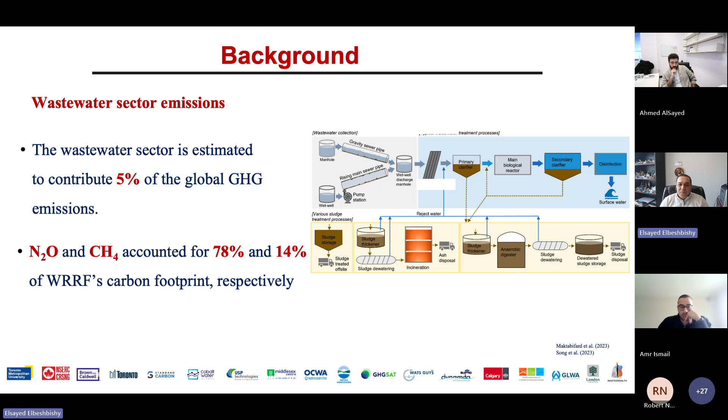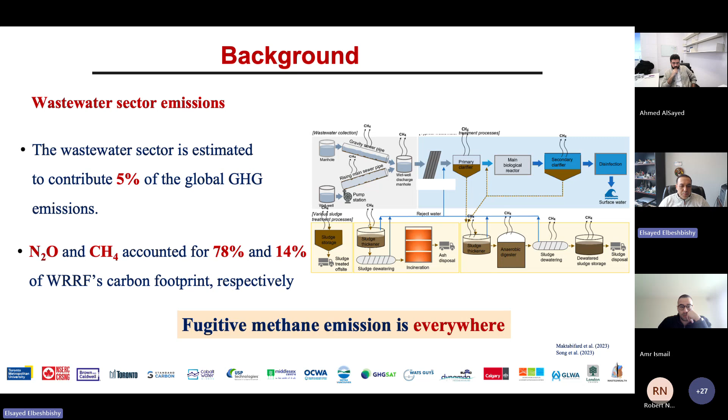Today, we're going to focus on fugitive methane emissions, and based on our experience over the last 3 years, we can say with all evidence and confidence that fugitive methane emission in any wastewater treatment plant is everywhere. You cannot exclude a single process that does not have that methane emission, except the disinfection process, but all the other processes have the potential of producing fugitive methane emissions.

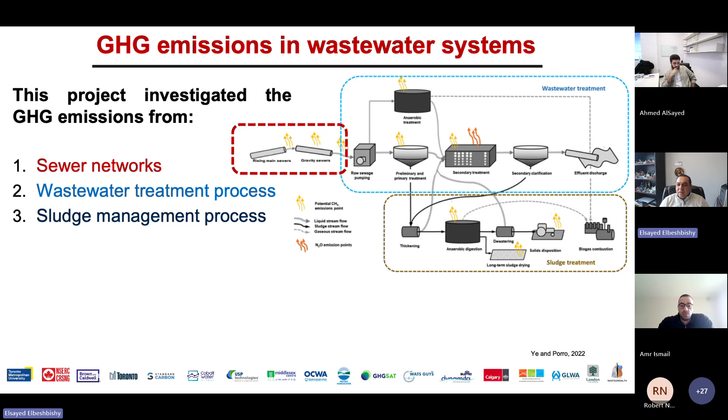This specific project was quite a large project focusing on the three main components involved in greenhouse gas emission, starting from the sewer system, where we now have one of its kind two pilot sewer systems, and we are in the process of producing a digital twin for the sewer system, the first one in Canada. We're also examining greenhouse gas emissions, both nitrous oxide and methane, from the main wastewater stream, as well as the main source for fugitive emission in wastewater treatment plants, which is sludge management.

There are different sources, as you may know, for the different emissions. We are focusing on methane emission in today's presentation.

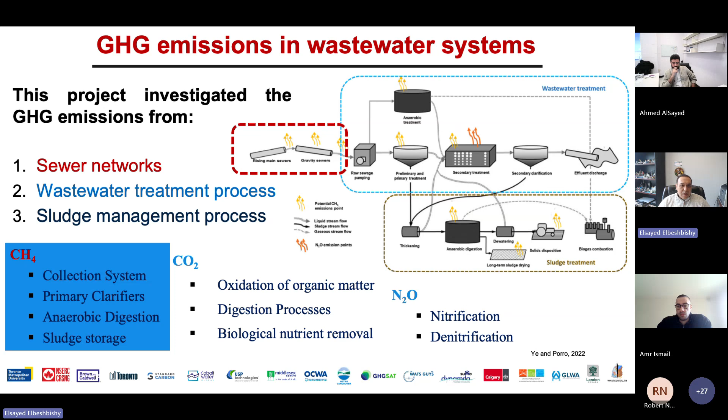In this specific project, the dream at the beginning, not only the goal but a dream, was to have what we call a multi-level greenhouse gas detection, starting from ground sensors, then a handheld OGI camera, and then going to another level with drones, aircraft, and satellite.

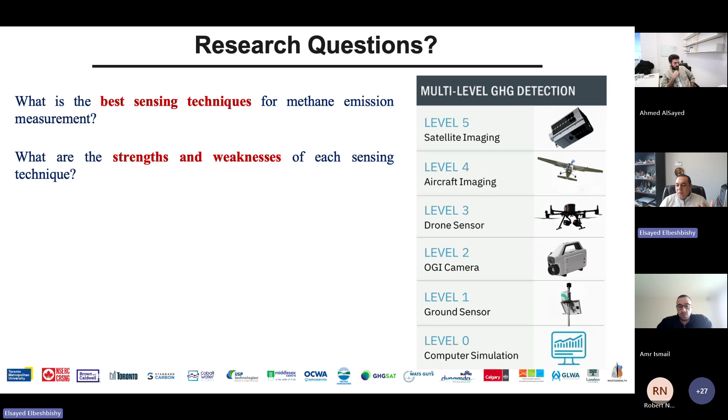At the beginning we had a few research questions we wanted to answer. By using those different detection sensing methods, what is the best sensing technique for methane emission measurements? What are the strengths and weaknesses of each of those detection techniques? And then we wanted to implement modeling, both mechanistic models and machine learning models as well.

One of the goals for this project was to estimate the methane emission from the plant-wide scale and compare it with the default calculation using the IPCC emission factor. Then, by investigating that plant-wide modeling, we wanted to see what opportunities the model can offer versus the challenges we have when we go through that process.

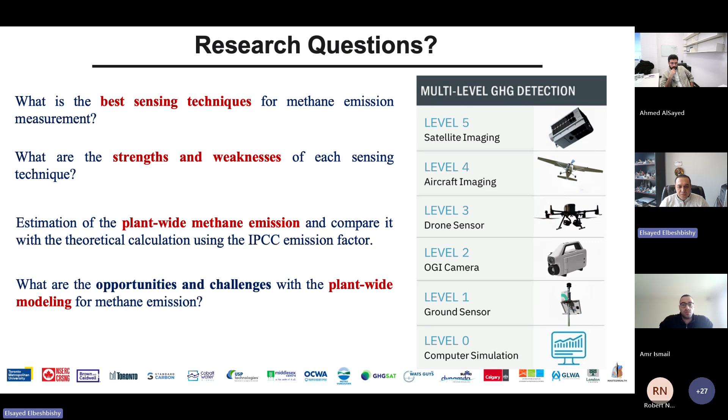This is the part where we are going to share with you our learning experience through this journey of examining the plant-wide methane emission from a specific plant site.

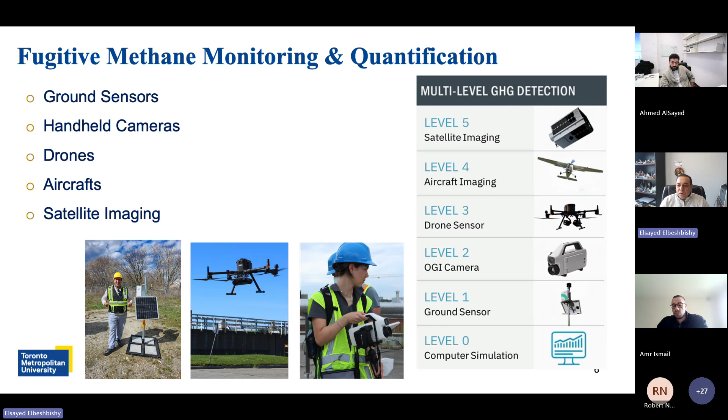As I mentioned, we used different sensing techniques, starting from fixed ground sensors, handheld cameras, drones, aircraft, and satellite images. When we went through this journey, there were a lot of challenges with each of those sensing techniques, and I'm just summarizing some of the challenges that pushed us to further invest in the modeling part, because we see there is a great opportunity in that modeling, as Ahmed will explain in the next slides.

Based on our experience with the sensing technologies in general, it is resource intensive. It requires big investment and is logistically demanding, especially if you want to measure methane emission using the drone. The logistics behind that, getting the approval, and all of those things is really demanding and requires some effort. On the other side, there's the accuracy and the detection limit.

For example, satellite imaging covers a big space, but it requires a certain emission threshold, otherwise you wouldn't be able to detect the methane emission using satellite images, and the same for aircraft. This is one of the challenges: some of these sensing techniques cannot be applied for wastewater treatment plants if you don't have high emission flux or concentration.

Another factor impacting all of those sensing techniques is the weather. If the weather is not good enough for the drone, for example, you cannot fly it, or if it's foggy, you cannot use the aircraft. Satellite images are also impacted by the weather.

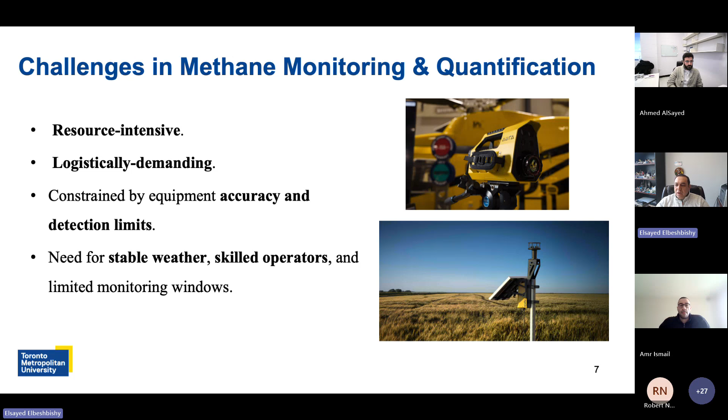So all of those limitations gave us an opportunity to think: there is a role for modeling in this project. And from that, we pushed toward investigating the plant-wide model. I think Ahmed will go through those opportunities and challenges for the plant-wide model.

Ahmed will share with you the role and potential of plant-wide models in the estimation of fugitive methane emission. So Ahmed, I'm leaving the floor to you.

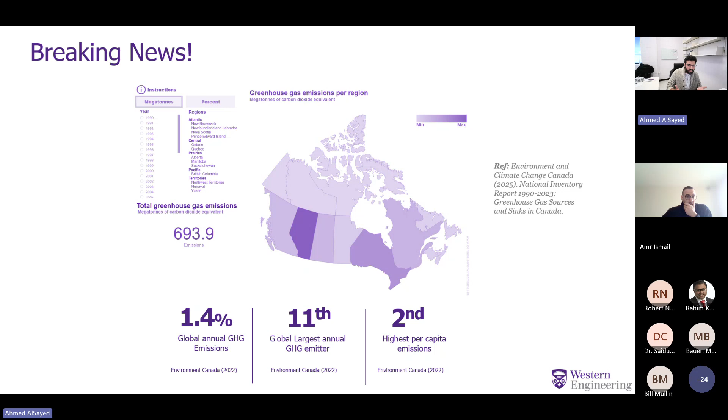Canada is actually contributing to this. I think Canada is one of the most progressive countries looking into means to mitigate it. But so far, statistics say we are the 11th largest contributor to greenhouse gases. If we normalize per capita, we are kind of like second. So we are actually contributing, and that's why the government cares about this, putting ambitious plans to mitigate it, aiming to reach the net zero emission goal by 2050.

So what does that have to do with wastewater treatment plants? There has been a lot of literature looking into the impact of wastewater treatment plants. Early on, we were thinking maybe scope 2 emissions — electricity driven, related to energy — would be the main driver. But by looking further, we notice that scope 1 emissions, the direct emissions, are actually the key contributors to greenhouse gases, coming from different biological processes.

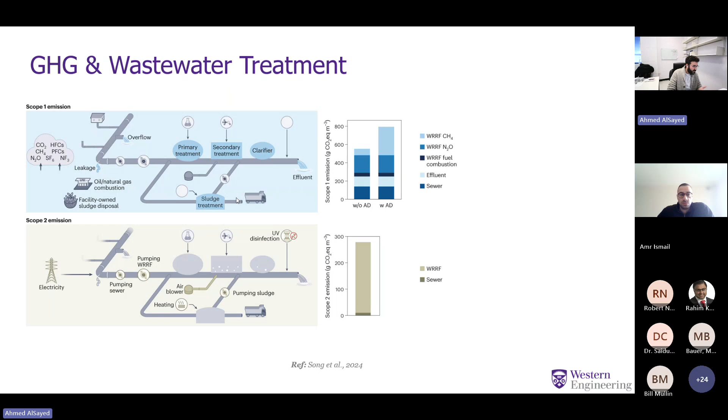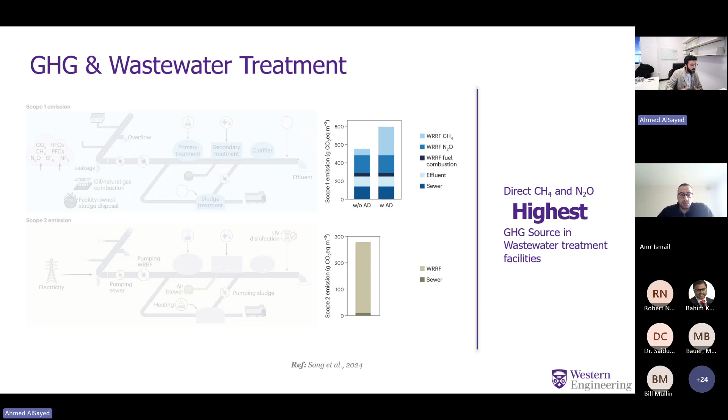In many countries, including Canada and many provinces, we rely on green energy sources, whether nuclear, if you consider it green, or hydro. So decarbonization of the energy sector is actually making direct emissions more and more important. By looking into that, the wastewater treatment sector is considered the third or fifth largest contributor to non-carbon dioxide greenhouse gases, second only to energy and agriculture.

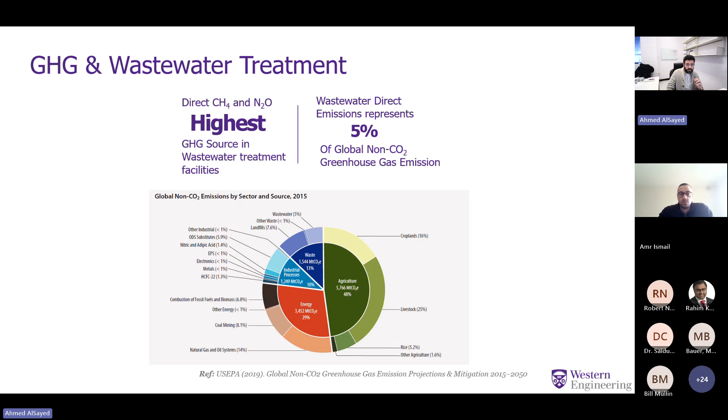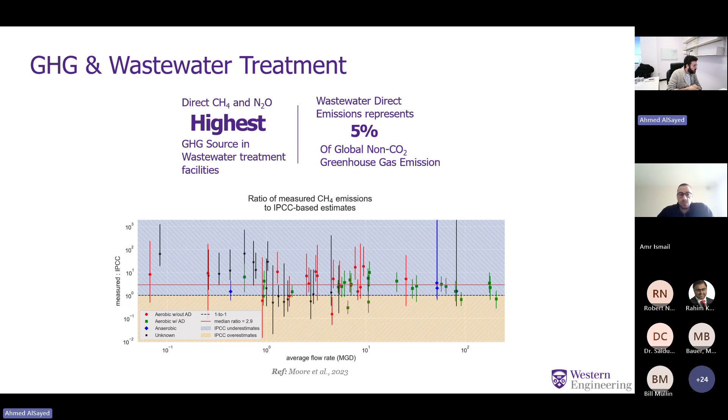So it's important. But what really matters for this research, what makes it more important, is actually the uncertainty or variability around the estimation of methane emissions, greenhouse gases in general, but for the focus of this talk, the uncertainty around that.

If you look into this research done in the US, looking into different treatment plants, different sizes, different configurations — with anaerobic digestion, without anaerobic digestion — what you can see is that regardless of whether we're talking about the same type of treatment systems or different systems, there is variability within the treatment plant itself. You can see from the huge variability that even estimating one treatment plant has huge uncertainty. And even the same type, for example the red ones, vary significantly in how much emission is there.

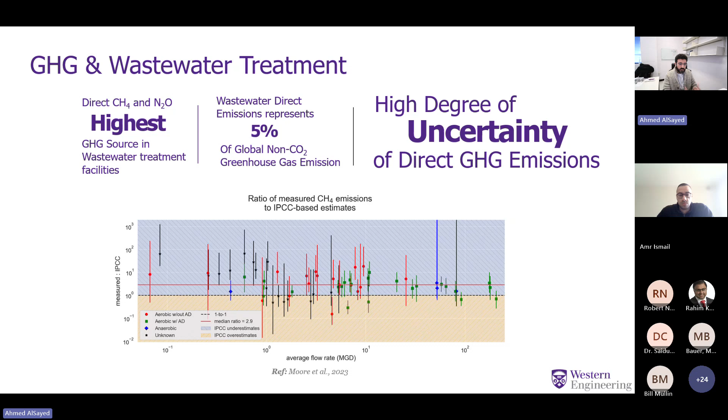So for me, this says the key question we still have is how we can quantify it, or how we can manage things to do this. We have two main challenges we've been making progress on. The first is quantification methods — I've used this meme from The Office for every single talk I give on greenhouse gases. We sometimes believe we know exactly how to quantify it, how to measure it, but while we're making progress, I can't argue that we know 100% what we're doing.

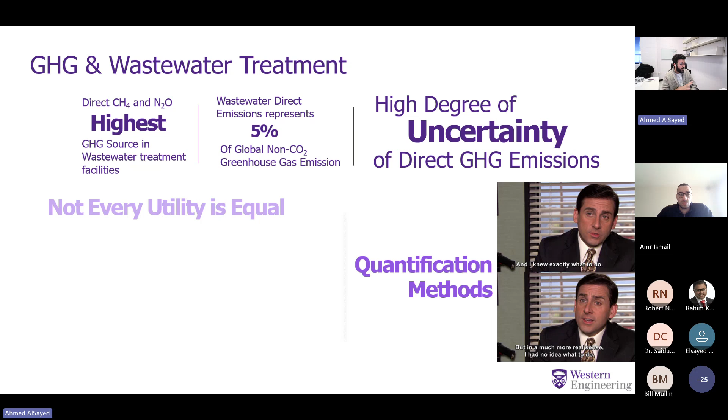The other challenge is basically that not every utility is equal. For example, in the literature it's suggested that nitrous oxide is the main contributor to the greenhouse gas or carbon footprint of a treatment plant, because of its high global warming potential. But our experience going to different treatment plants showed that in some cases, methane can actually be the main contributor, depending on how treatment is managed, how the system is operated, what the compliance limits are, and how everything works. And even that profile changes, and how dynamically it changes is something to consider.

My take on that is it depends on how you operate, how you manage it, and how you handle things. That makes diagnostics and mitigation strategy a key thing—we need a tool that tells us if we're moving more toward a greenhouse gas emitting situation or the other way around.

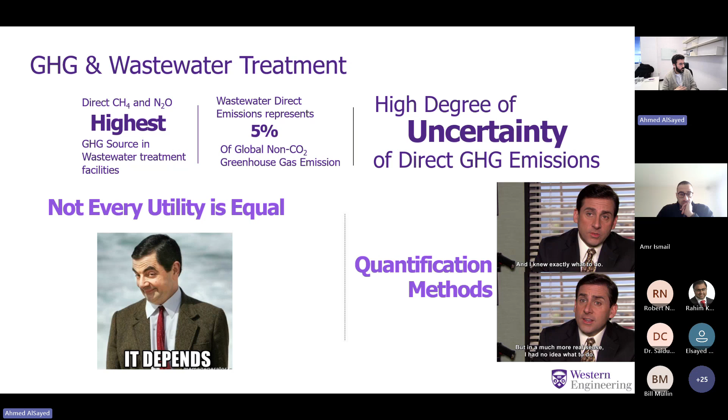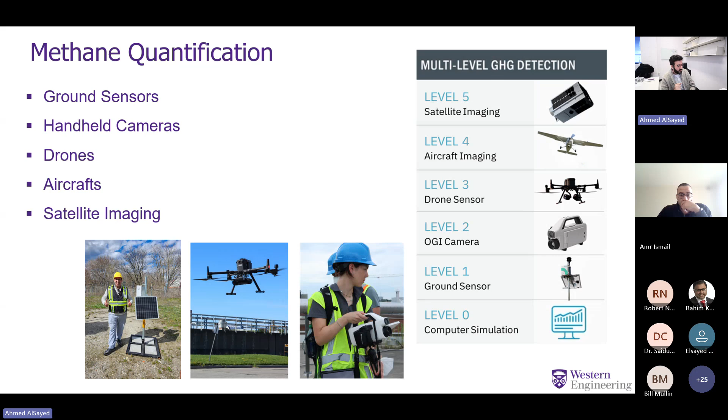Let's focus more on fugitive methane emissions and how we do this, leading to why we need to do plant-wide modeling. As Dr. Said said, for this project we've been looking for about 3 to 4 years into different means of quantification: satellite imaging, aircraft imaging, drones, OGI cameras, ground sensors, and definitely computer simulation.

Based on our experience looking into those different components, we can look at the specificity of those tools—how specific is it, how capable this tool is of isolating one source and saying this emission is coming from this specific process, and also how accurate it is, or how much we trust the result.

So the uncertainty around it, or the standard deviation—we look into it that way—and also how continuous it is. In specificity, when we try to isolate something, we look into the spatial component of it, and when we look into continuity, we look into the temporal component, how it's changing with different dynamics.

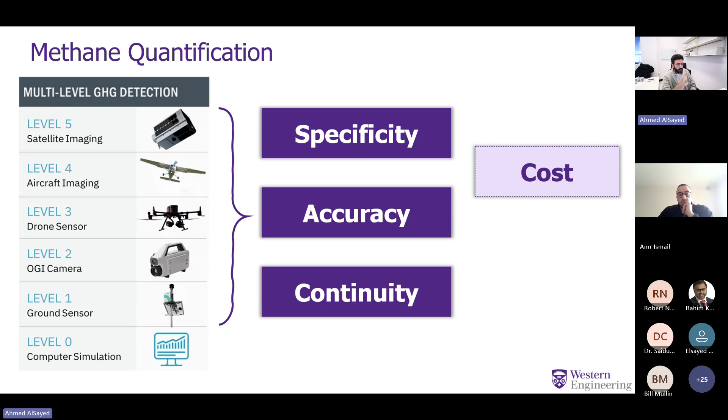When we try to design what kind of campaign we'll have, we look into two main things: how much it costs to make this feasible for treatment plants to apply, and also how good it is at diagnostics. Because if eventually we know how much we're emitting but we don't know how to mitigate it, how this links to how we operate the treatment plant, then yes it's valuable information, but maybe we can do better and do more.

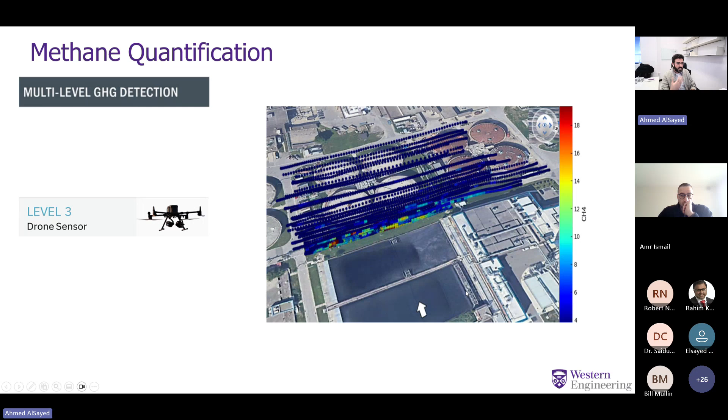I'm not going to go over every single thing—I'll just give an example with drones. This is typically how drones look. If we have a system like this and some wind conditions, we fly the drone, build the curtain, and then fly it upwind, downwind, or other ways to isolate this source, and then estimate the emissions coming out of it.

If we take this as an example, we can see it gives us quite good specificity—we can isolate sources. Its accuracy is okay, acceptable compared with other systems, quite accurate. It doesn't give us any continuity because we cannot keep measuring this all the time.

We cannot capture any dynamics in the system. It's quite costly—you have to bring drones, which are expensive, with a pilot, and facilitate a lot of logistics for the campaign. Its diagnostic value depends on when you fly it, how you fly it, and if at that time your emissions were coming out. I'll talk about the nature of methane emissions in a second.

If you try to make this more helpful for diagnostics, you have to do different campaigns over a year or over a fixed interval of time—you'll have some better continuity, but it won't capture all the dynamics. You'll have significantly higher cost, and maybe that improves your diagnostics, but you're struggling with high cost, maybe not very good diagnostic capability, and because of the lack of continuity, maybe accuracy is okay.

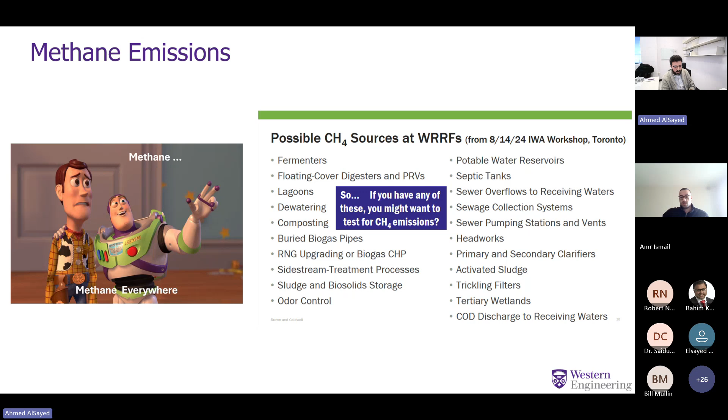And the reason why it's important, as Dr. Said was talking about—another thing I always show in my talks is that methane is everywhere. It's fugitive, it comes from many different reasons. This is a screenshot from a workshop in Toronto we had in 2024. Almost every place can be emitting methane.

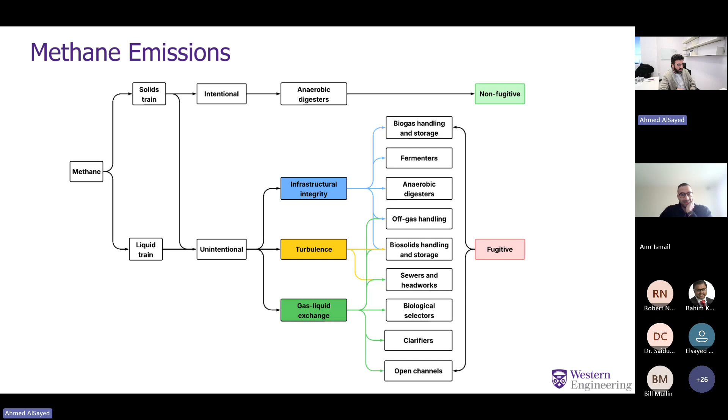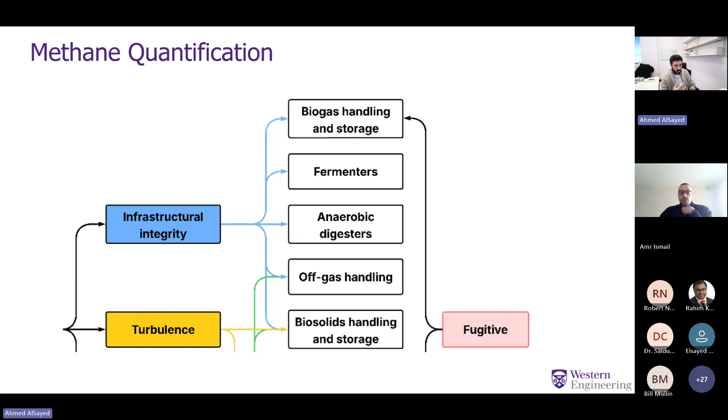Working with Amr, we tried to group this into some means of grouping to see which ones we should care about, and actually eventually we ended up caring about everything. Only the methane intentionally produced by anaerobic digesters is the one we don't need to worry about. But other than that, it can be unintentionally emitted from many different reasons—gas handling or leakage because of lack of infrastructural integrity for all the processes where anaerobic digestion can be produced.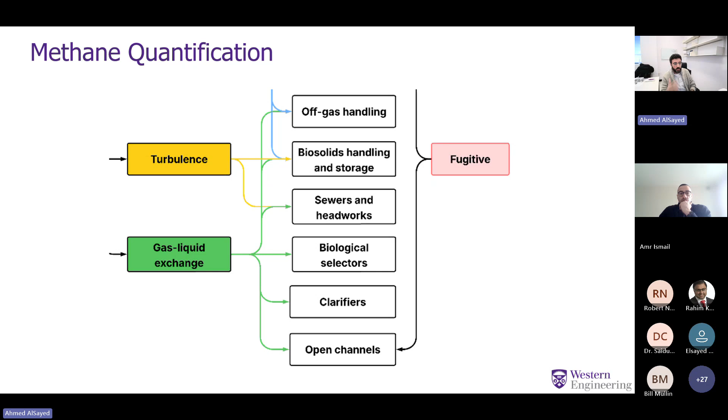It can be because of gas liquid exchange, something coming with the sewers, so it starts to be released, some unintentional dead zones in your aeration tanks. So we have emissions out of that, it can come from everywhere. But the key here is that this is unintentional, so it doesn't have to be continuously coming out. We won't always know when exactly it's being emitted and when it's not. So it's important to have some sort of continuity and some sort of diagnostics.

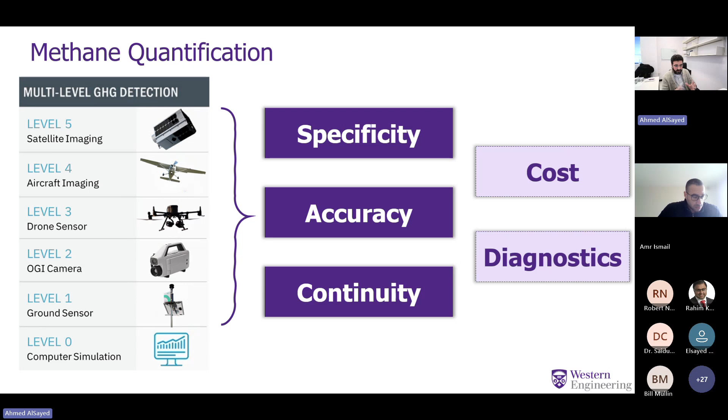If we look into any of those 5 tools, we will always struggle balancing everything to have proper cost and good diagnostic tools. The only thing that can give us low cost and proper diagnostic tools is basically modeling. So that's how we came up with the idea: let's use plant-wide modeling to do this, because this would be the only tool that gives us proper accuracy, very comparable to what we get out of the drone. Amr will talk about how we compare what we get with what's available in the literature.

It's going to be very specific. You can model any process and get the results. The cost is not going to be too high because it's basically model-based, and it can give you a very large diagnostic capability, because you can try scenarios, try different alternatives and test them, and you can tailor it to be as accurate or as far from accuracy as you would like to.

And here I just want to show that even when we fly different drones with different capabilities, and this hopefully will be published soon, we still get a very high uncertainty limit. So even if the accuracy based on the calibrated models wasn't 100%, it's very comparable to what we usually get out of things. So what would we do?

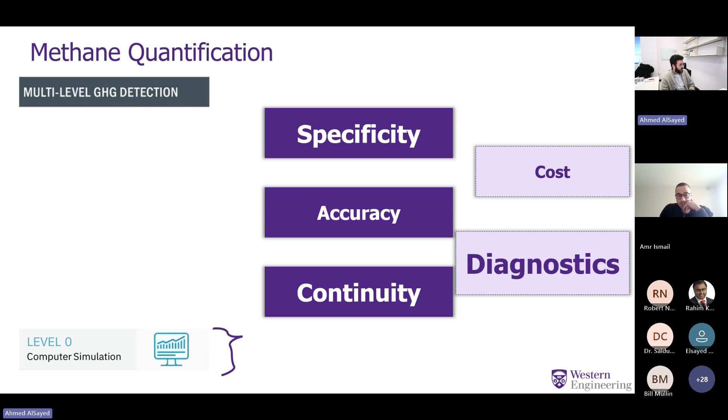Just very briefly, the idea is that we start to look into plant-wide models. Why not do this? This was part of the research that we have done, and Amr continued to look into the literature. We looked into it together, and basically we found that in many cases we just use empirical values like IPCC emission factors and pair this with activity data. If we have proper data or more detailed data, we can have a little bit more accurate estimation.

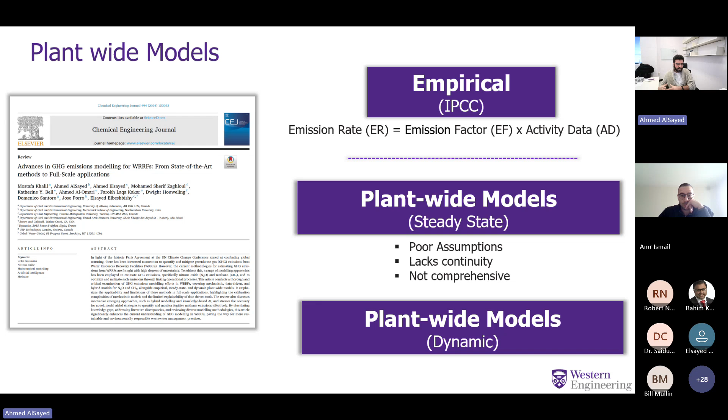But this is kind of static. Then we have different plant-wide models, either steady state or dynamic, but we always struggle with poor assumptions, lack of continuity if we're talking about steady state models, or that it's not comprehensive enough. It does not cover all the unintentional sources that we're talking about, it just focuses on one or two assumptions. It says EF is the key, so it's going to be a fixed percentage out of it.

So basically what we are proposing, and what Amr will talk about more, is a plant-wide model that gives us reasonable accuracy, has high specificity, and covers different sources of greenhouse and fugitive methane emissions. It can be monitored continuously, it's very low in cost, and it gives us a very high diagnostic capability. Basically, it covers all unintentional sources, so pay attention to different things that can be estimated.

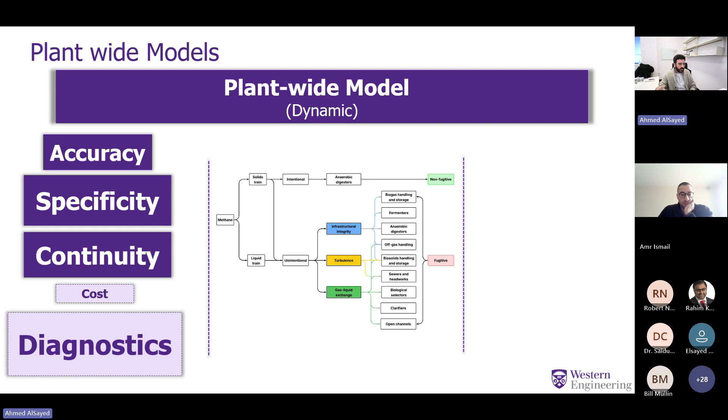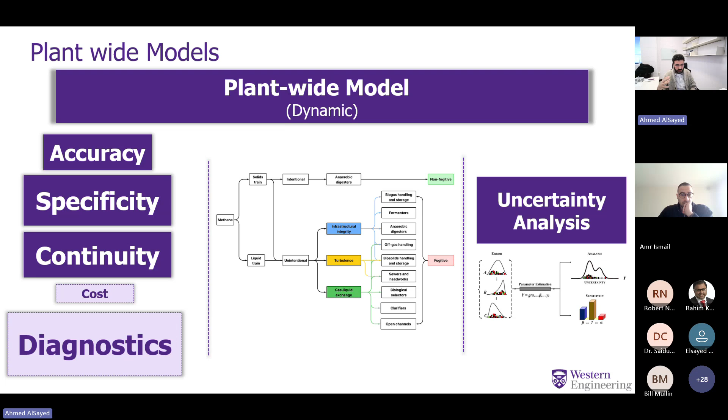Also, what we have specifically for this case, and Amr will talk more about that, is we figured out that we don't have enough data about every single case we want to test, and we don't have enough information about the methane emissions coming out of it. So we did different scenarios to start some uncertainty analysis, and see if those cases, given what we know from the literature, can get us to end up with high methane emissions. And with that, thank you, and I leave it to Amr.

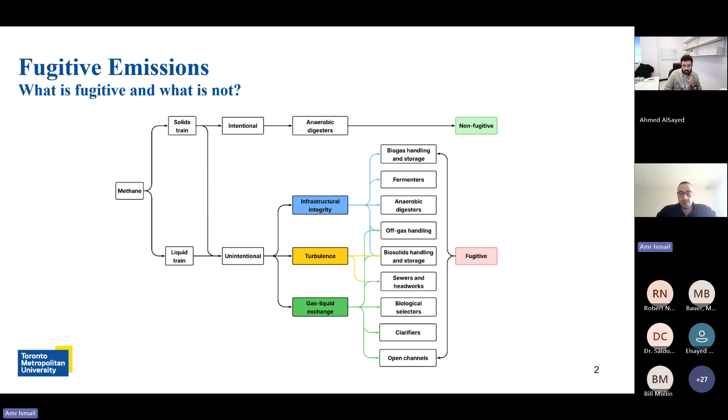As Ahmed pointed out, methane emissions can simply occur from every single process. It's only produced intentionally in the solids train in anaerobic digesters, but unintentionally in the liquid train and also in the solids train through biogas handling, fermenters, off-gas handling, leaks, changes in temperature, or whatever it is. So it can be emitted from every single process, and that would be considered fugitive, because only in anaerobic digesters, where it's produced intentionally, is it considered non-fugitive.

But the problem is there's a difference between the dissolved methane and the gaseous methane. Dissolved methane comes from the sewers, from the sludge blanket of the clarifiers, from fermenters, from bioreactors, and from sludge dewatering liquors that are recycled back to the plant's headworks. It's only in the gaseous phase from fermenter off-gas, digester headspaces, and dewatering.

The problem is the main focus of monitoring campaigns is quantifying the gaseous emissions, and the dissolved methane remains a blind spot. How does it remain a blind spot?

As Dr. Elsayed and Ahmed mentioned before, you need almost perfect conditions to take on a monitoring campaign, and plants do not operate continuously. Let's say you're doing your campaign early in the morning and the plant has already done the dewatering and done all the recycling at night. Depending on the sewer network, you're receiving that dissolved methane also at night, or at some part of the day when you're not monitoring anymore.

And all of this interferes with the accuracy of the monitoring campaign and plays into the cost, because you would need to cover the whole day, which nobody would do.

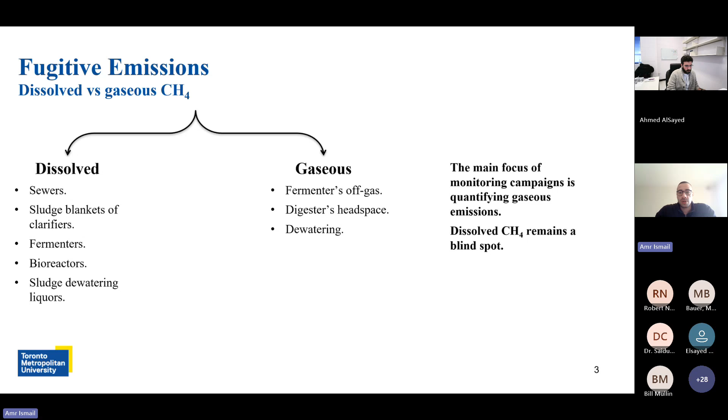In this case, the plant we were working with is a very large plant, a biological nutrient removal plant, so we have a lot of different process configurations that can also emit methane. It's not just aerobic processes removing carbon or doing only nitrification — you also have anaerobic zones, anoxic zones, and fermenters that can also be septic sometimes.

You also have recycle streams from the digesters, dewatering, and sludge thickeners. So all the potential process units that can produce methane exist in this plant.

The treatment here is divided into 4 trains — this is plant A, plant B, plant C, and plant D — and the flow rate is not distributed equally between those. We also have a fraction of the primary sludge that is fermented in the fermenters to produce VFAs.

Since it's a cold-region wastewater treatment plant, sometimes the SRT is decoupled from the HRT, meaning the sludge sits in the system way longer than the liquid, which can also cause it to digest and ferment and produce methane. Eventually, all of the fermented and thickened sludge is pumped into 8 mesophilic anaerobic digesters, and the biosolids are either treated off-site or on-site.

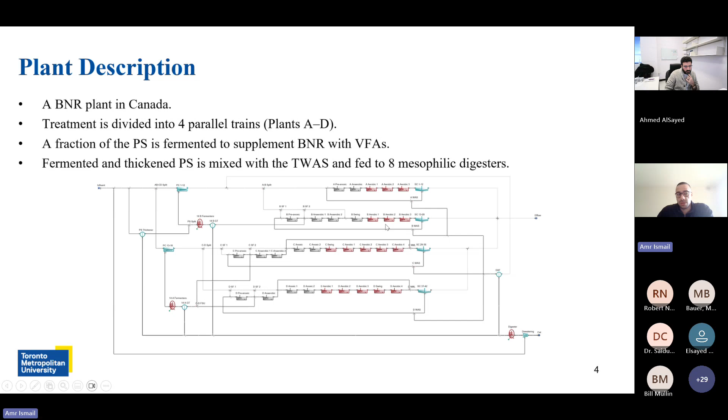For us to be able to do all of this, we needed data for the model. The plant operators were kind enough to give us about 3 years of operational and performance data. All of this data has to be aggregated into a single data set and then pre-processed.

No data from a plant is going to be perfect. You'll find categorical values like some stat, NR, E — all these symbols that don't really mean anything, and they cannot be added to the model. So we're removing categorical values, removing any negative values because they cannot be negative, and removing all the zeros.

Rows where there were shutdowns or operational upsets cannot actually be introduced into the model. We made sure the data that was removed wasn't enough to compromise the work we did, because it was only a fraction of it — we need actual long-term data for the model to capture temporal and diurnal changes.

Also, an important part of data reconciliation is making sure the data is correct. Measurement errors occur, and you can always reconcile something. Let's say the sludge COD is a bit off — you can reconcile it with the TS data, which is more accurate and less prone to error, because thickened sludges tend to be very difficult to actually analyze.

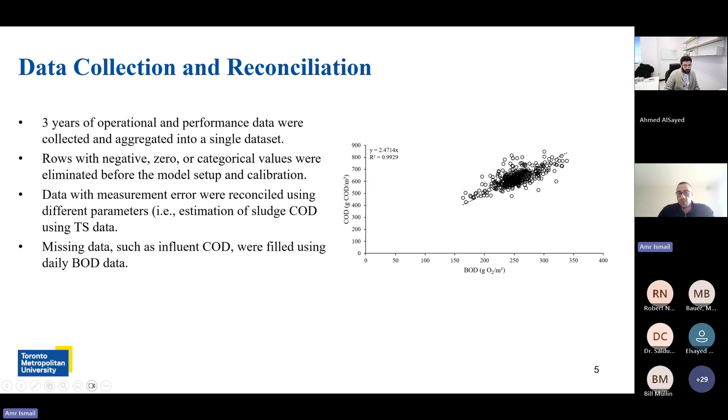Then we go to the model's setup and simplification, and we cannot just do that blindly. We have this guideline for using activated sludge models that we always reference. There's a trade-off between model complexity and process fidelity. We want to simplify the model as much as possible so it's easy to use and manage, but we also want to capture everything. So we have to find that fine line between simplifying it, but not so much that you're missing out on the benefits of the model.

So we were using Sumo here. Sumo number 2 was the model that we used. It's the simplest BNR model, has 2-step nitrification and denitrification, and enhanced biological phosphorus removal, which is basically all we need. Methanogenesis is also included, so it can capture the methane from both hydrogenotrophic methanogenesis and acetoclastic methanogenesis.

Similar process units like clarifiers, bioreactors, fermenters and digesters are combined into a single unit. We have 8 digesters on site, but flow is distributed equally, and the biogas is collected from all of them at the same time. So I don't need to add 8 digesters into my model. I can just put 1 digester and it would suffice.

Parallel trains are also modeled as a single train. Plant A, for instance, has 4 reactors, and the flow split between them is equal. So I don't need to model the 4 trains, I can just model the whole plant as a single train. Also, physical separation units like the DAF, dissolved air flotation, and gravity thickeners are modeled as volumeless point separators, because if they're modeled as actual units, the model becomes very complex and it's almost impossible to calibrate.

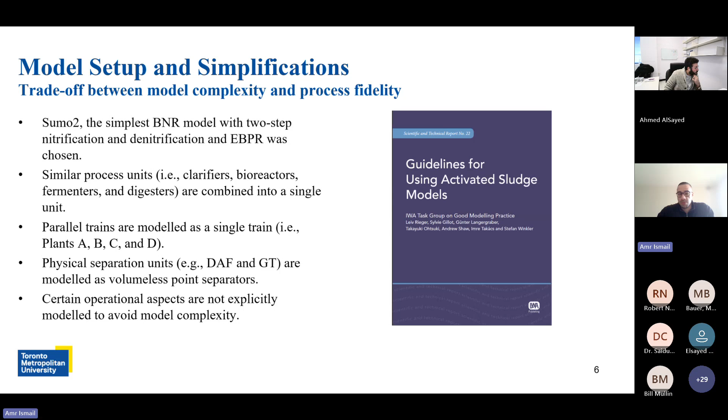Also, certain operational aspects are not explicitly modeled to avoid model complexity. Something like fermenters receiving elutriation water to wash out the VFAs as much as possible is not modeled explicitly, but as long as we can match the characteristics of that supernatant, we're good.

And then model calibration and validation. Calibration is the process of adjusting the model parameters to match the plant's behavior. There's a steady state and a dynamic state calibration that can be carried out.

And the calibration process involves basically global plant-wide changes. For the influent, we had respirometry data to make sure that the influent coming to the plant is actually represented correctly, because otherwise anything downstream is wrong from that point.

Something like the decay rate of ordinary heterotrophic organisms. In the fermenters, we have to adjust hydrolysis rate and fermentation rates. For digesters, we also have to adjust hydrolysis rates, pH inhibition limits, and other variables like the hydrogen yield during fermentation. Sometimes these parameters are over-exaggerated and you need to calibrate them accordingly. Correction factors and effective saturation depth make sure that the dissolved methane in the digester that is going to escape eventually is actually modeled correctly.

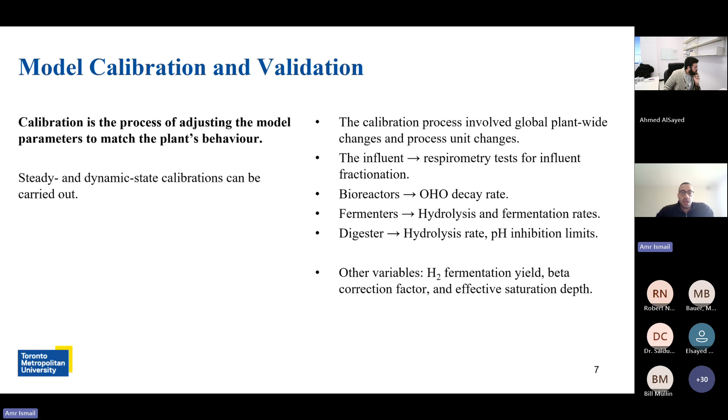After that, the validation ensures that the calibrated model behaves similarly with independent data. So if we did the steady state calibration on the median of the entire data set, now we're modeling the entire data set to see if it can capture the dynamics and capture them correctly also.

And then we look at different scenarios. So the baseline scenario, which is the existing scenario inside the plant. We have bioreactors as a source of methane that can be producing it in anaerobic and anoxic selectors. Digesters, we have 8 anaerobic digesters, and basically any discrepancy between the reported biogas and the modeled biogas production could be considered a leak, but not necessarily. So this is a basic source.

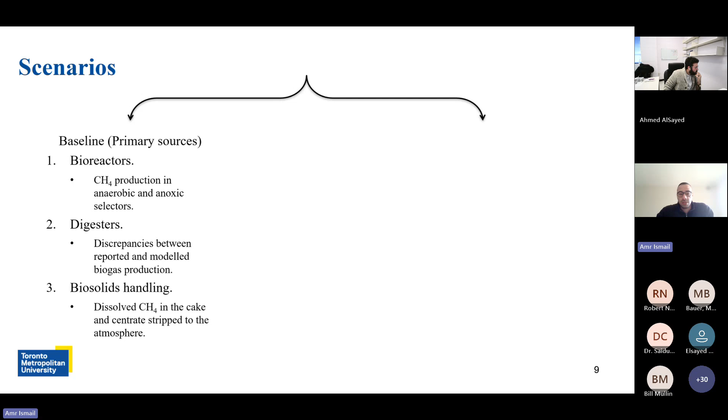And then you have biosolids handling. Any dissolved methane from the digesters going into the biosolids handling facility, whether it ends up in the cake or in the centrate, is going to be stripped into the atmosphere. And then we added potential sources for the scenario. So we have sewers, any methane stripped through aeration or turbulence. And then with the sewers, we divided them into a lower bound and an upper bound scenario.

So there are networks that receive septic tank effluents and gray water, so they would have more dissolved methane. And then we have the typical gravity sewer network that would not have that much methane, but there is still a certain concentration of it.

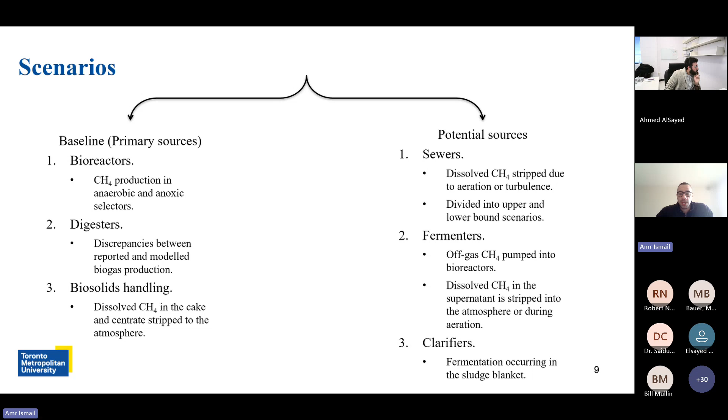We have fermenters on site that were not producing methane, but what if they were producing methane? Because the off gas of the fermenter is pumped directly into the aeration tanks, so anything would be stripped into the atmosphere and would be considered fugitive. Also, clarifiers were considered as a potential source afterwards.

So for the uncertainty and sensitivity analysis, we do the uncertainty analysis in Monte Carlo simulations, which is basically iterating. We have certain data as input, and each of those has a certain distribution. We pick randomly from each parameter and do multiple iterations. Here we did almost 1 million iterations to get a final distribution of what the output of the model would look like. And we did that to calculate the uncertainty in emissions and the corresponding emission factors.

With the sensitivity analysis, we used the Sobol method, which is a global sensitivity analysis method that gives us two important metrics. One is the first order Sobol index, which provides insights into the contribution of individual variables to the output variance. And then the total Sobol index, which accounts not just for a single parameter, but their interactions with each other. And these are the equations that we used.

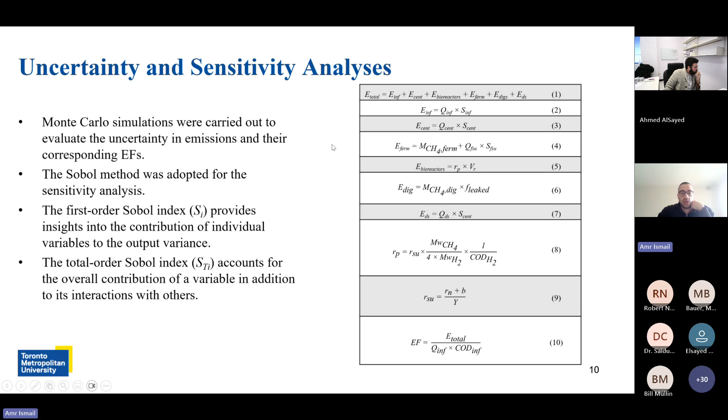So total emissions include the emissions from the influent, from the centrate, from bioreactors, from fermenters, from digesters, and from the dewatered solids. Everything here is just calculated based on the mass of the dissolved methane that would eventually be stripped into the atmosphere.

So results of the model calibration and validation from the steady state calibration, we can see steady state calibration is a lot less prone to errors compared to the dynamic state. And we can see the acceptable errors from the guidelines are very high, and the absolute error that we got from the model was very low.

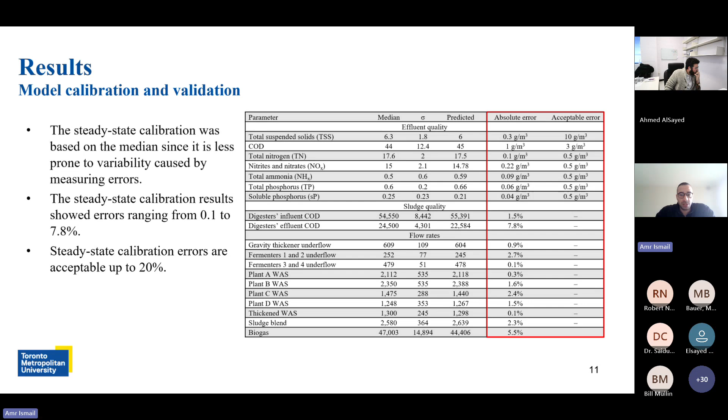Also, discrepancies between whatever we were trying to predict, like sludge COD and effluent COD, ranged from 1.5% to 7.8%. All the other parameters had very low discrepancies between them, so it gives us confidence moving forward to the validation process. The maximum error we got was 7.8%, and the acceptable error in a steady state simulation is actually 20%.

For the dynamic state, this is basic. We can see the digester's influent COD load, which tells us that the sludge going to the digester is modeled correctly. And the sludge leaving the digester is also modeled correctly. So we have confidence in the biogas that is being produced, because it's basically just a conversion factor at this point.

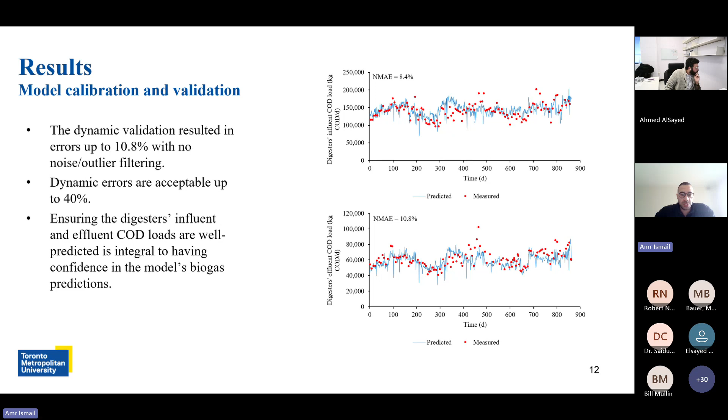So the error in the dynamic simulations was around 10.8%, and we didn't really remove outliers or any noise from the data after the reconciliation, so it's pretty good, especially since the acceptable error is actually 40%. So just making sure that the influent and effluent of the digester is correct, which is our main source, ensures that the methane we predicted is also correct.

So when it comes to the primary sources, what you can see here is the discrepancies between the predicted methane and what was reported. We can see discrepancies ranging between 0.04% to 38%. And those discrepancies do not necessarily mean that they are leaks. It could be something due to instrumentation, flow meter drift, pipeline modification, etc., or actual emissions.

And this is where the diagnostic part comes in. So if you have a plant-wide model and you can see that there's a problem or an issue, it doesn't necessarily have to be a leak, but at least I know where I should be looking and how I should fix it. So I go check my flow meters, I go check my pipelines and all of these parts that can contribute to this, so I know where to go. And this is where everything is guided, and I'm not just in a mess trying to find out where the source of the emissions is, but the model is actually guiding me to where it is.

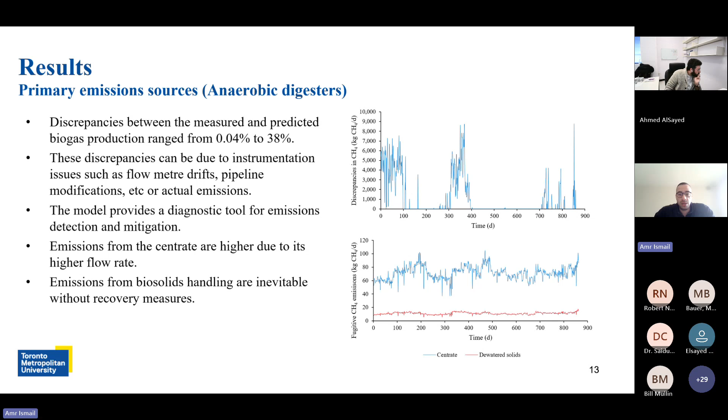Here, we're looking at the emissions from the biosolids handling. We can see that the centrate has higher emissions, but that's just basically due to the higher flow rate, because the dissolved methane in the digester is the same, and it's just split between the cake and the centrate, and you end up with a higher water content because of the dewatering. So it's not really a matter of any production here.

When it comes to the other primary sources, like the bioreactors, emissions from the bioreactors were about 245 kilograms per day, and most of it was through hydrogenotrophic methanogenesis, not acetoclastic methanogenesis. So it's through the hydrogen pathway mostly, and that's because hydrogenotrophic methanogens have a higher growth rate compared to acetoclastic methanogens, so 1.3 versus 0.3, and they also can consume hydrogen at very low concentrations.

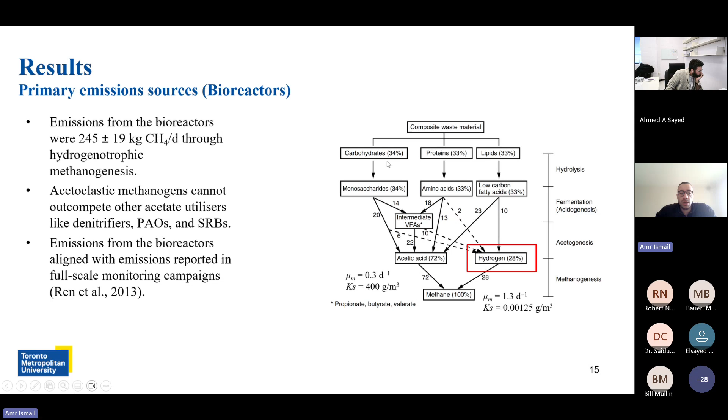The half saturation constant here is 0.00125, while for acetoclastic methanogens the half saturation constant is 400, which is basically the concentration at which their growth rate is halved. So when it comes to acetate, they cannot compete with other acetate utilizers, but hydrogenotrophic methanogens can actually do that. And they matched the emissions from full-scale studies.

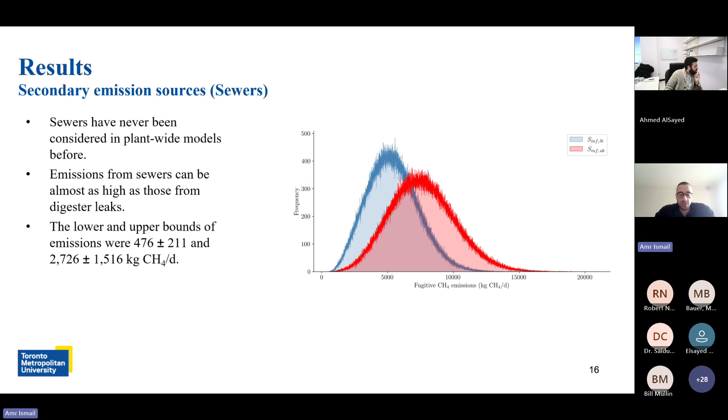For the secondary sources, we have sewers. Sewers have never been considered in plant-wide models. They were always assumed to have stripped into the atmosphere at the headworks of the plant, but they can actually be almost as high as those from digesters, depending on the flow rate of the wastewater treatment plant. So the lower bound emissions were about 476, and the upper bound was 2,726 kilograms of methane per day. Also fermenters, because the off gas of the fermenter is pumped directly into aeration tanks.

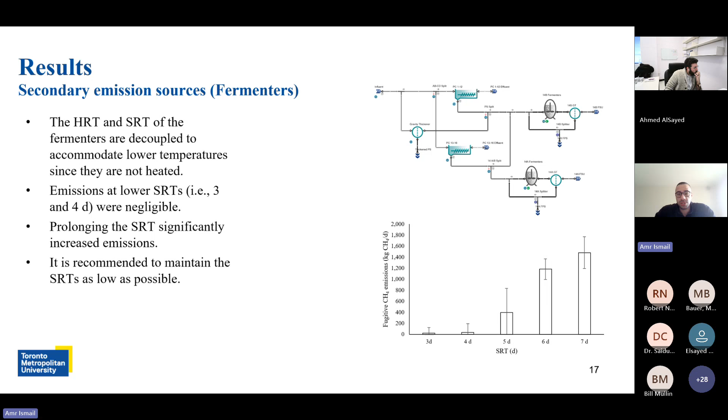So this is the model that we did for the fermenters, and you can see the emissions here. At 3 days and 4 days, it does pick up some methane, but then eventually just goes down. But at 5, 6, and 7 days, even though the plant is operating at temperatures that are not ideal for fermentation, around anywhere from 9 to 18, you can still produce methane.

Another source is the clarifiers, and the clarifiers are not easy to calibrate, not even for solids removal. We had to do something else here, just some basic mass balance calculations. So the idea is: is the effluent concentration and the concentration in the sludge blanket similar or not for any soluble species? Is there ammonia accumulating in the sludge blanket while the ammonia in the effluent is fine? Are we seeing denitrification in the sludge blanket? Are we seeing phosphorus release? If we are not seeing these things, we're fine.

But if we are, then we calculate the release of ammonia. The increase in ammonia would give us an indication of the amount of volatile suspended solids that have been fermented. From there, we can calculate the amount of COD that has been released, and then we can see that the discrepancies in the COD can account for methane that has not been accounted for, or carbon dioxide, depending on the pathway. But this is also part of the uncertainty.

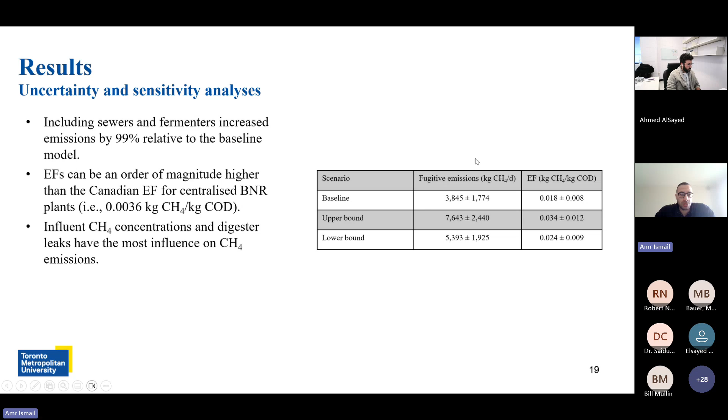Conclusions here: plant-wide models can either minimize or remove the need for resource-intensive monitoring campaigns. They can also be used as diagnostic tools, driving decision-making and mitigation strategies. Also, fugitive emissions are significantly underestimated, and national methane inventories might need to be revised, considering emissions are only assumed to originate from anaerobic digesters.